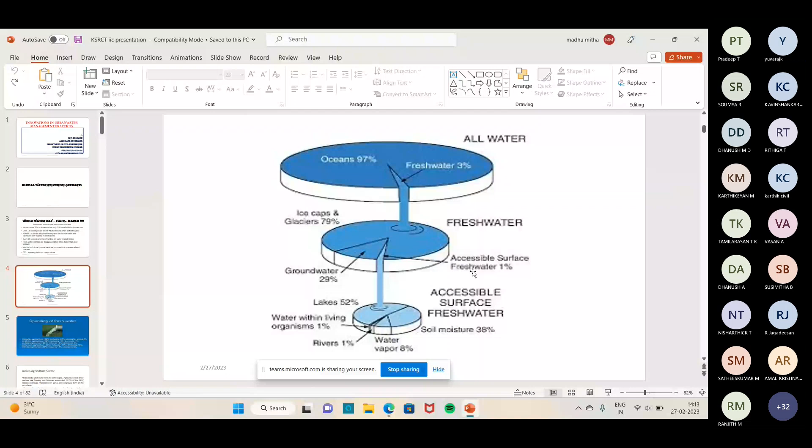This is what I just mentioned. Ocean covers 97 percentage, and the remaining only 3 percentage is freshwater available. Within this freshwater, only 29 percentage is available as groundwater, and only 1 percentage is accessible surface freshwater. So you see here, at least only 1 percentage of water is available.

Among this 1 percentage of available surface water throughout the globe, within this 1 percentage, lakes cover 52 percentage, water within living organisms covers 1 percentage, and the remaining soil water covers 38 percentage.

So almost 1 percentage of water only covers the river streams. So imagine the availability of water. Though there are plenty of water available in this world, only 0.03 percentage of water is available as river, or stream waters.

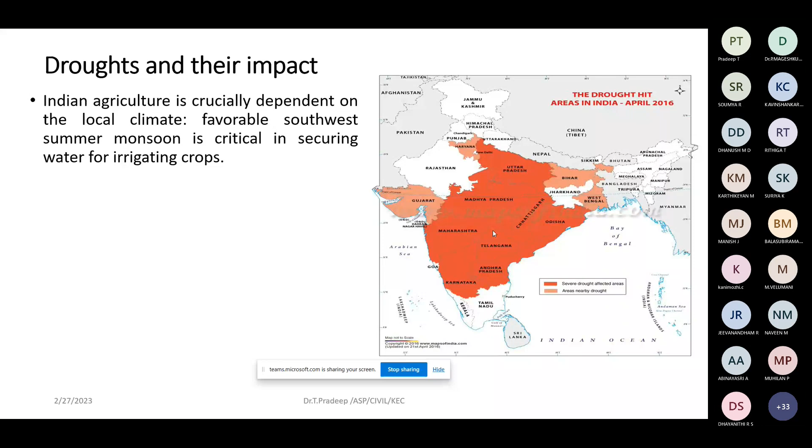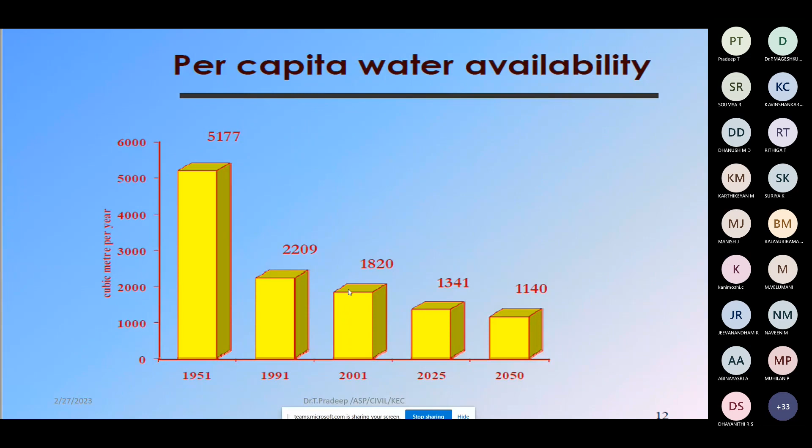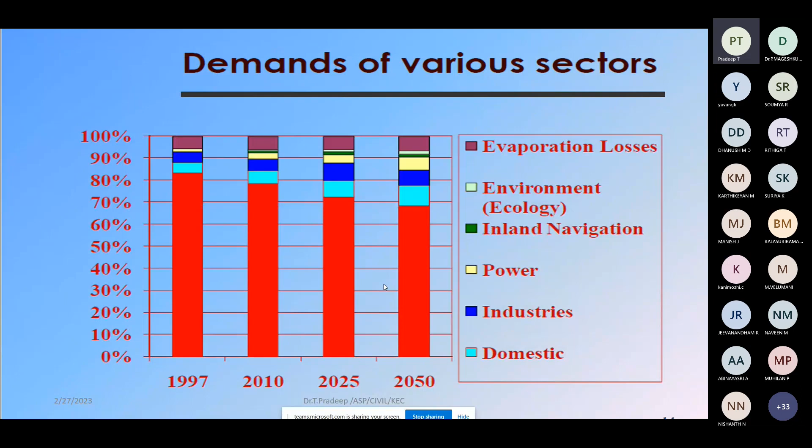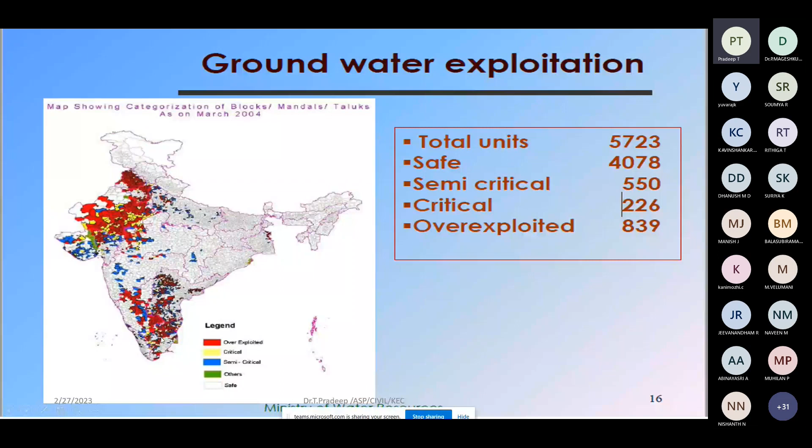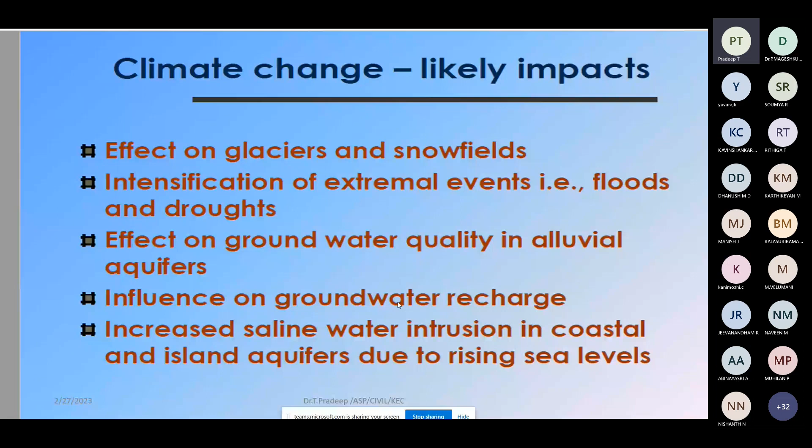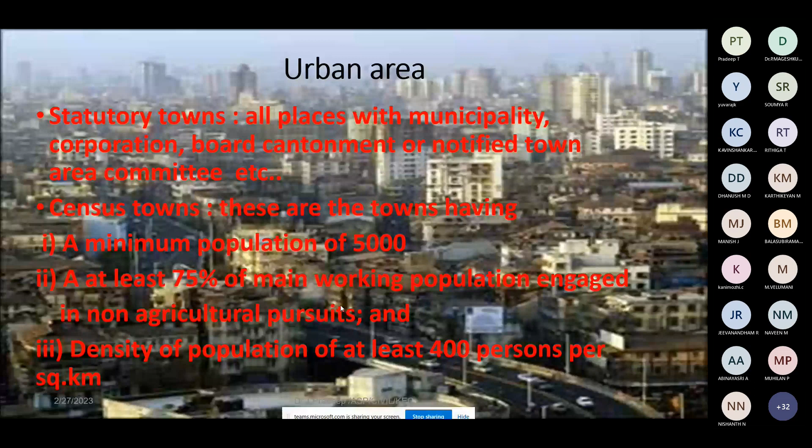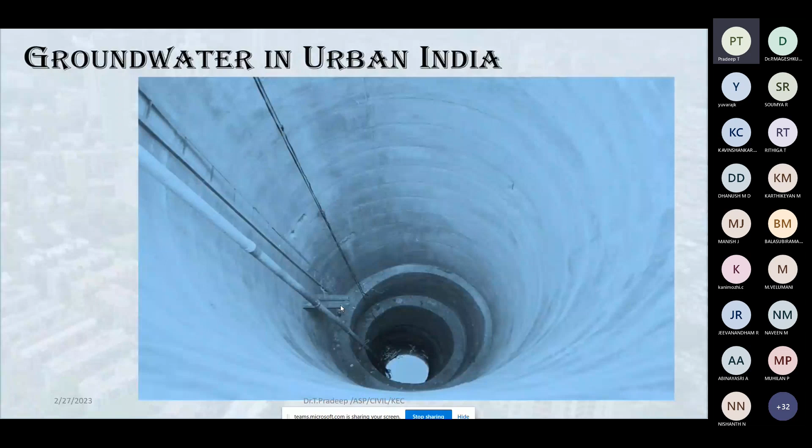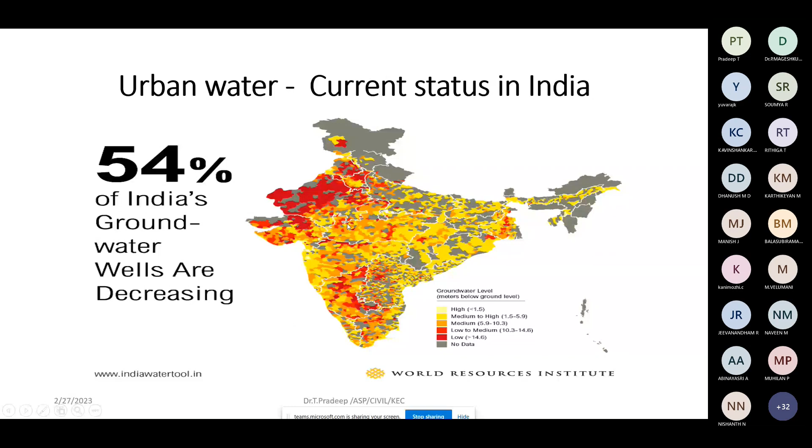Yes, this is also another category, in the form of the simplest explanation. We are getting 4,500 kilometer cube of water from rain per year. So you can imagine what is a kilometer cube and what area it consists of.

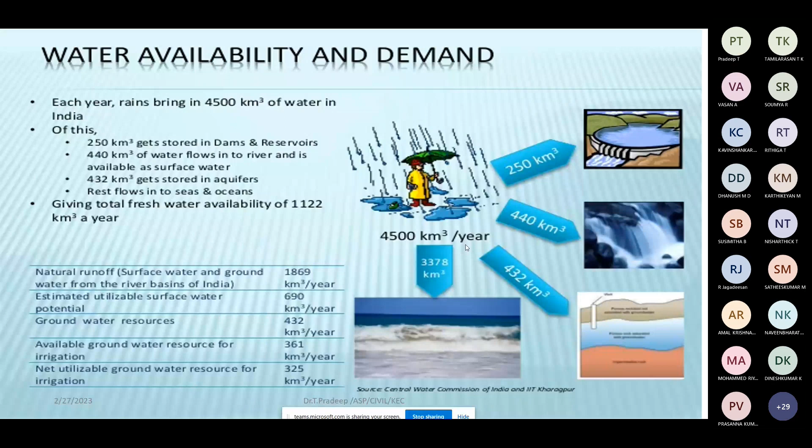Now, urban water management in India. About 30% of people in India live in cities, and this is expected to double by the year 2050. So imagine the amount of water required during 2050 if that 30% doubles. For example, if 50% of people live in cities and 50% live in rural areas, you can imagine the exact amount of water required for rural areas is directly equal to the amount required by urban people also. So with the growing economy and changing lifestyles, the pressure on already strained water resources is increasing.

That is why the government has taken an initiative and established Integrated Urban Water Management, IUWM, as a new framework and approach for the nation. They are planning so many activities like the Urban Clean Ganga projects and many other projects, even for small categories of projects. They are establishing and taking charge of these kinds of initiatives under Integrated Urban Water Management.

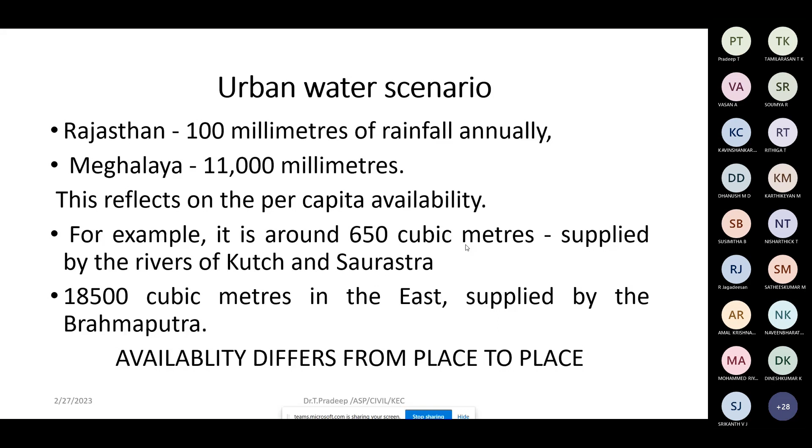So that is the challenge behind urban water management. For example, I can quote an example: in Bangalore, which is an urban city, Bangalore draws water from river Cauvery, which is around 100 kilometers far away from the city.

What is the reason behind this? Even though river Cauvery is 100 kilometers far away from the city, they draw water for day-to-day life from this river, even though it's far away. The reason is, most of the roads in Bangalore, as you may be aware of this city, most of the roads and pavements are made up of concrete.

This concrete won't allow water to filter into the ground. It will directly allow the water to run through wherever slopes are available, and the water easily runs through it but is not percolated into the ground. That is why the groundwater recharge level in the nearby area is very low. It is not possible to get enough water from wells located in and around Bangalore city. Even if you go for a borewell located inside Bangalore city, it is not possible to get water even after 100 feet, 100 meters of borehole. So this is improper planning, and this is what we have to concentrate on as civil engineers. We should also take a view on this.

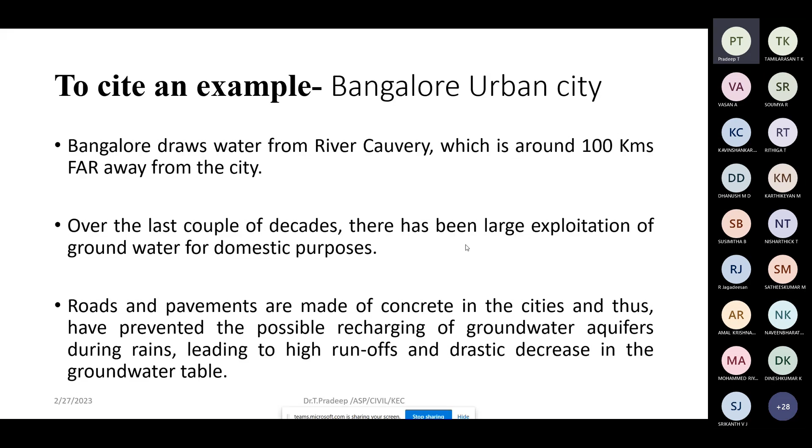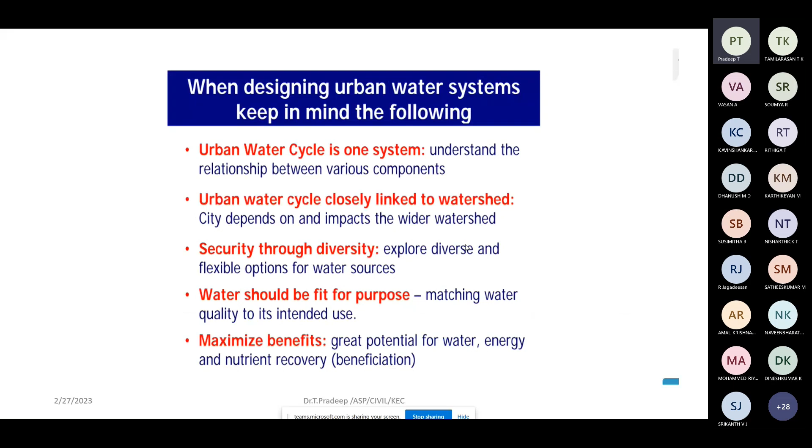This is another example of why water management, if not proper, causes us to suffer. While designing urban water systems, we should know the actual urban water cycle and how it is closely linked to watershed, security through diversity, with water fit for purpose for maximum benefits. Doing more with less integration is the key.

So what is the problem? A holistic systems approach to the urban watershed is needed. What is meant by watershed? It consists of water reachable areas. If you connect almost all the watersheds, you will get a very large amount of water moved from one place to another.

So we can carry out some integration activities. For example, a tailored IUWM, or integrated urban water management framework, is required for developing countries. Take a country as an example: there is water scarcity due to highly polluted water bodies, intermittent and irregular energy supply, fast growing cities, low pressure, lack of wastewater collection, high level leakage, and poor solid waste management. These are all standard problems identified in any city.

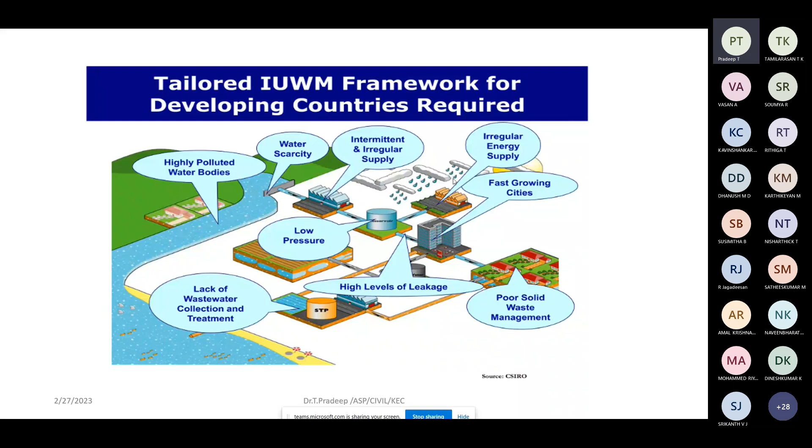In order to overcome these problems, an integrated approach is required. For example, stormwater, leakage, and demand management: there is groundwater and surface water supplying the water supply system, and water is sent for various purposes such as toilet and kitchen waste into septic tanks. From the septic tank, water goes for wastewater treatment, and it recharges and goes back into the water supply system.

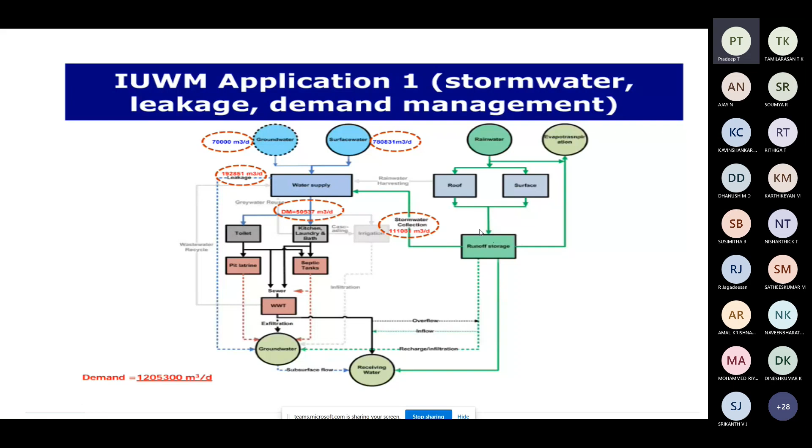So where is the source? Groundwater, surface water, rainwater, and evapotranspiration, with rainwater converted into roof water, surface water, and runoff storage. It should be somewhat cyclic in manner, so that it is possible to store at least some amount of water. This is also one of the places facing these kinds of issues in urban water management.

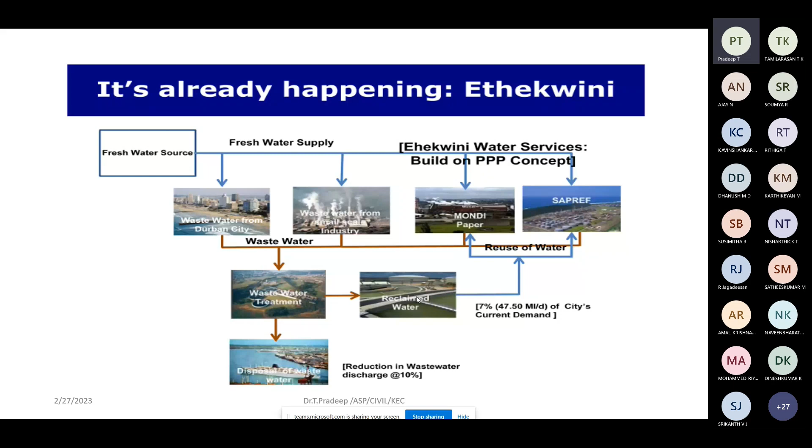They are getting fresh water supply built on a PPP concept to the Durban city, along with wastewater from small scale industry. This wastewater is sent to the wastewater treatment plant, and the remaining water is disposed or reclaimed for reuse. In small cities, they follow this approach with wastewater treatment plants, reclaimed water, and disposed water as integrated approaches to store water effectively.

This is what I already mentioned about water security threats. Taking three important threats: water security, enhancing irrigation potential, flood management, drought, climate change, and recycling and reuse of water are the major challenges in India for making any kind of attempt. Before attempting urban water management practices, these are some of the threats - water security is very essential, and drought and climate change must be managed. So there are hurdles or challenges available, and you have to overcome these to reach that particular level.

This is again the same point - challenges in water supply include rapid urban growth. Some additional challenges are urban growth, slums and poverty, climate change impacts, leaks and unaccounted water problems, weak political leadership, weak regulation, and institutional complexity. There are numerous factors available that have to be considered before getting into project management.

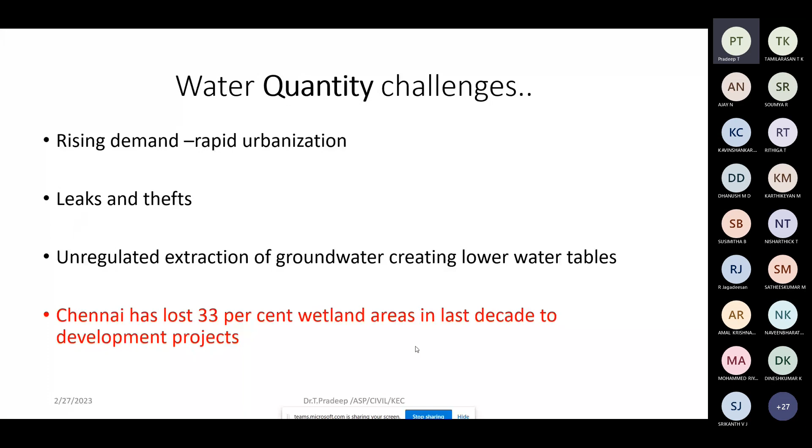One example I have quoted - how did Chennai lose its water? Three rivers, the Cooum, Adayar, and Kosasthalaiyar, are the main rivers in Chennai. They flow through Chennai into the Bay of Bengal. The Buckingham Canal connects all these three rivers.

Chennai used to be a water surplus metropolitan city till a couple of decades ago. Following the age-old conservation traditions in Tamil Nadu, they had an abundant amount of water two decades before. But what is the state now? What is the status in Chennai city? I don't want to explain because you yourselves know well the water scarcity that has taken place in Chennai.

We have also come across some floods - in recent days, two floods we have faced in Chennai. Even though there is an amount of water, it is due to poor management. Due to poor management, Chennai is facing a lot of floods.

Chennai had nearly 2 dozen water bodies, including 3 rivers and the British period Buckingham Canal. Today it is reduced to half a dozen. So 2 dozen means 24 water bodies were there; now they have only 6 water bodies. Where are the water bodies now? Because we have constructed so many buildings over the water bodies.

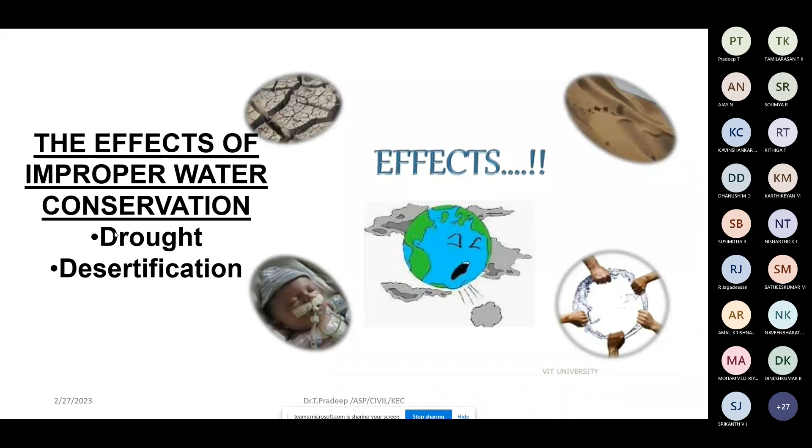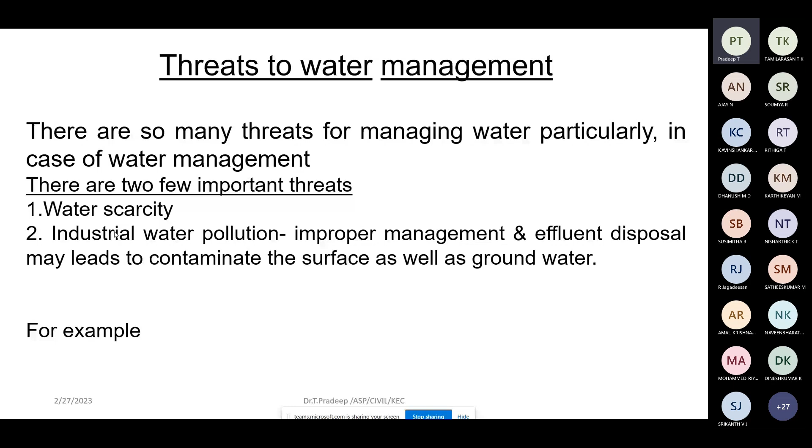There are some major threats: drought and desertification due to improper water conservation, water scarcity, and industrial water pollution. This is also another scarcity issue. There are some industrial heavy metal effluents - heavy metal, dangerous metals are there.

For example, if you take nickel, a heavy metal industry - there are categories like engineering industries, paper mill, fine chemical, and dyes. There are 4 kinds of industries, and each industry used to discharge their water into the river. Suppose the water is not properly treated, and without treating it, the water is directly sent into the river - then what will happen? It will directly affect the quality of the river water.

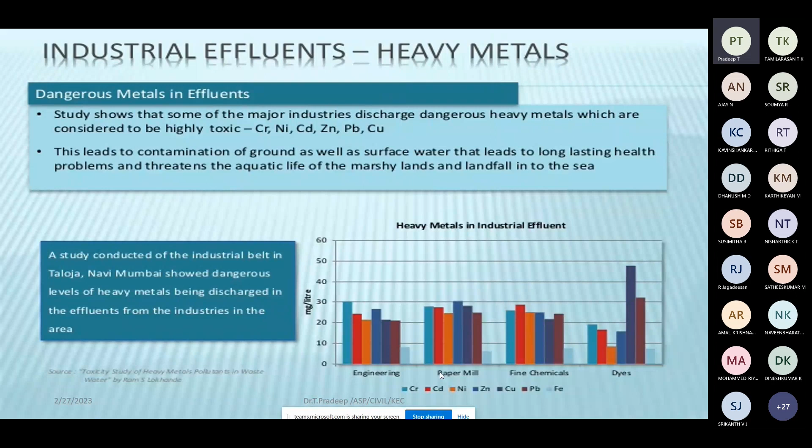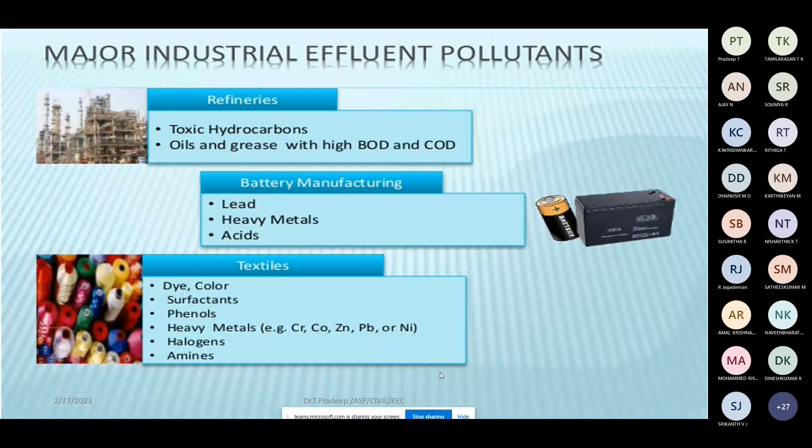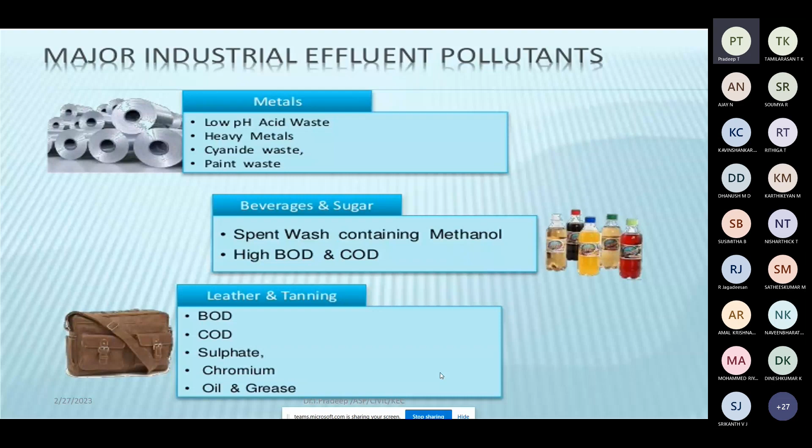So there are major industries - for example, battery manufacturing, refineries, textile industries. Though there are a number of industries, I have quoted a few important ones which have more toxic water processing: chemical industry, ink industry, pulp, paper, metal, beverages, and leather tanning industry are the important factors. These are industries that we have to give much more concentration to than others.

So what is the treatment process? What is the solution against pollution? It is water source management, water storage, treatment, and we have to recycle the water as much as possible.

There is a process called ZLD, zero liquid discharge process. It is the one we are following for most industries located in Tamil Nadu. Zero liquid discharge means that if you supply 100 liters of water for an industry, it should be properly treated after processing. For example, if you supply 100 liters of water, 80 to 85 percentage of it is converted and used for that particular process it was meant for. The remaining 20 percentage of water, along with the sludge, is converted as waste.

So what we have to do is send the water into the wastewater treatment plant. Among the remaining 20 percentage of water, they segregate and extract water as much as they can. So of that remaining 20 percentage, at least 15 percentage is recycled. This is called a zero liquid discharge process, so there will be no waste.

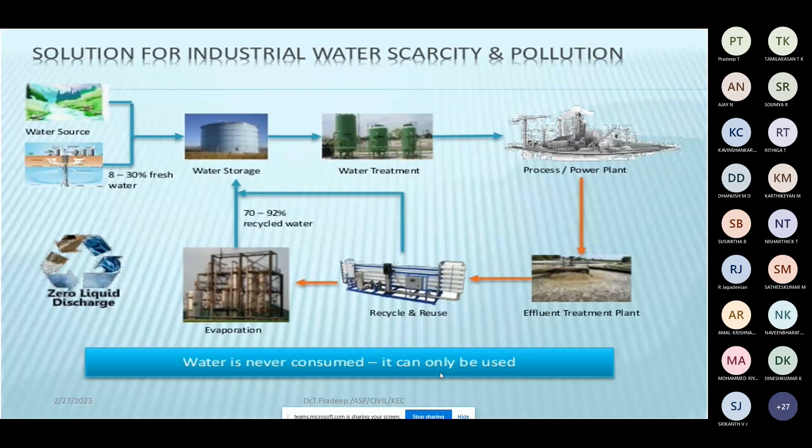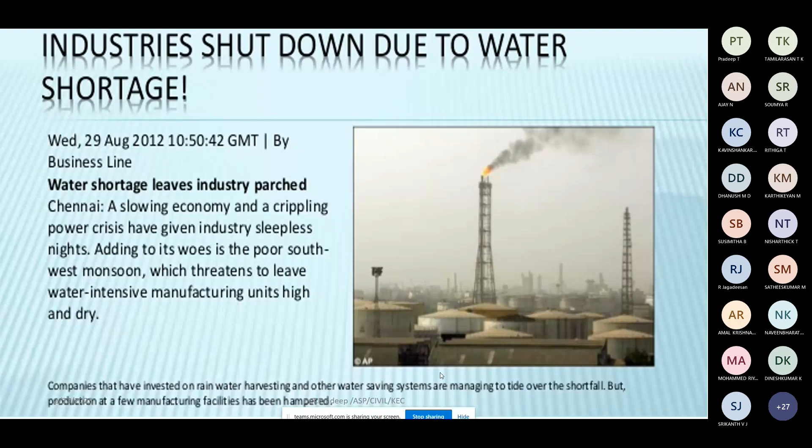One power plant also got shut down due to poor water shortage. The Vizag steel plant was also recently affected by this kind of water crisis. Vizag steel plant is one of the important and heaviest plants when compared to other Indian companies - one of the biggest plants, with n-number of products. They deal with crores and crores of liters of water for their industrial purposes.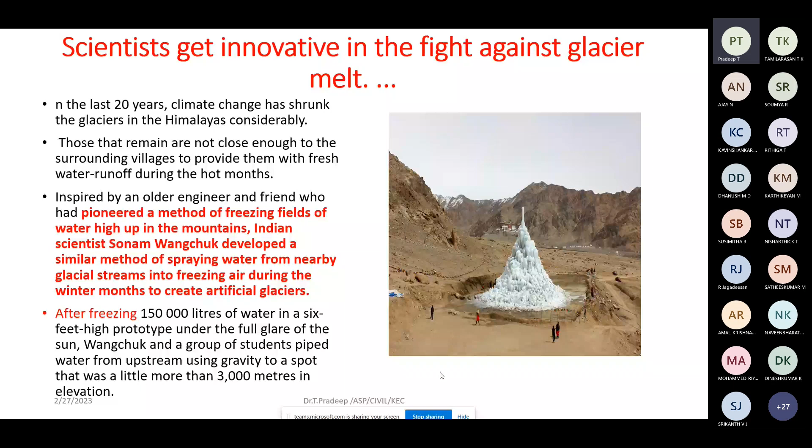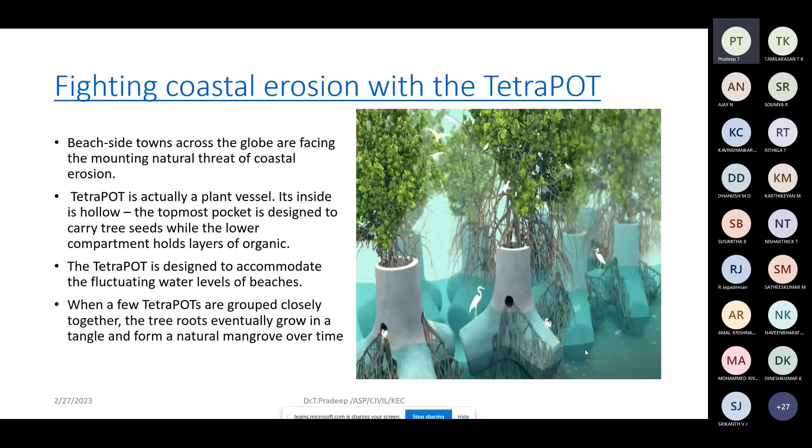Fighting coastal erosion with TetraPOTs - you might have come across these in coastal areas, used to avoid coastal erosion. Digitizing water supply lets you use water in a proper way. WaterSeer technology turns air into drinkable water, meaning the moisture content in air contains water, and this technique converts that moisture into actual water.

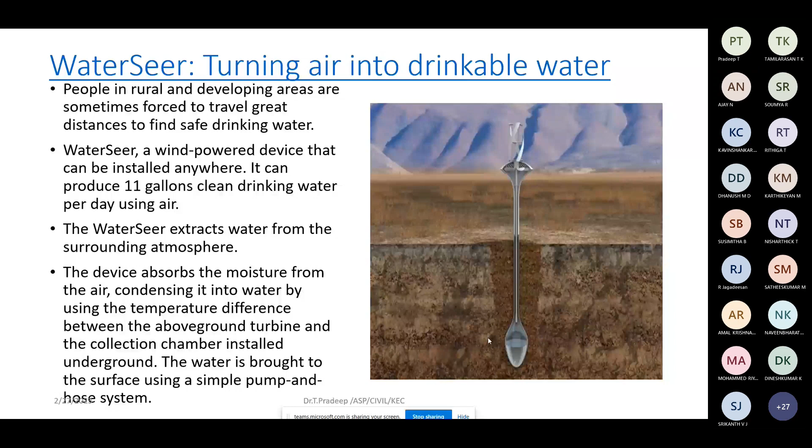Affordable filters are an innovative solution to water shortage, helping get water from one place to another. Fontus self-filling water bottles use humidity and moisture content so these bottles fill themselves - this trial and error method was developed by Austrian designer Kristof.

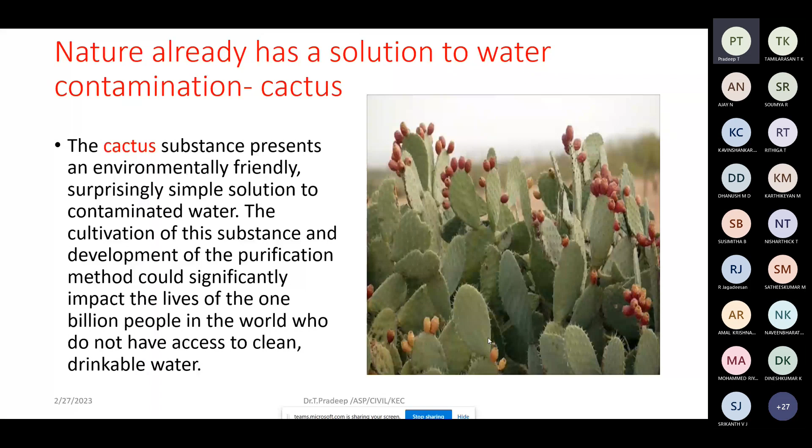Nature already has a solution to water contamination - that is the cactus, which is one of the water purification agents. Portable water purification for developing nations includes the LifeStraw mission, another important initiative to protect water.

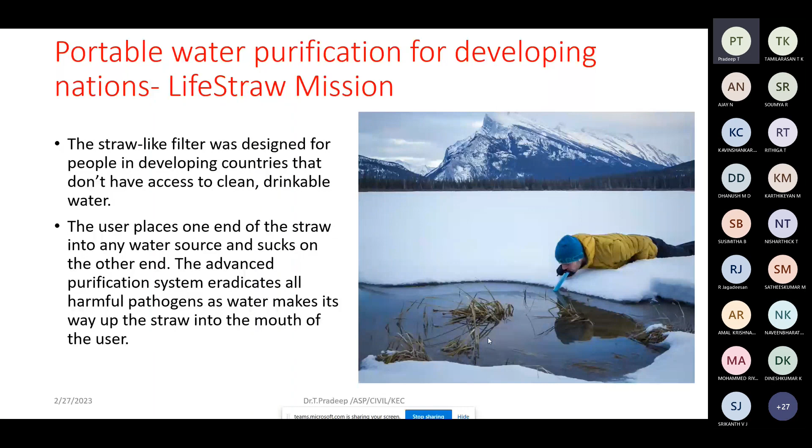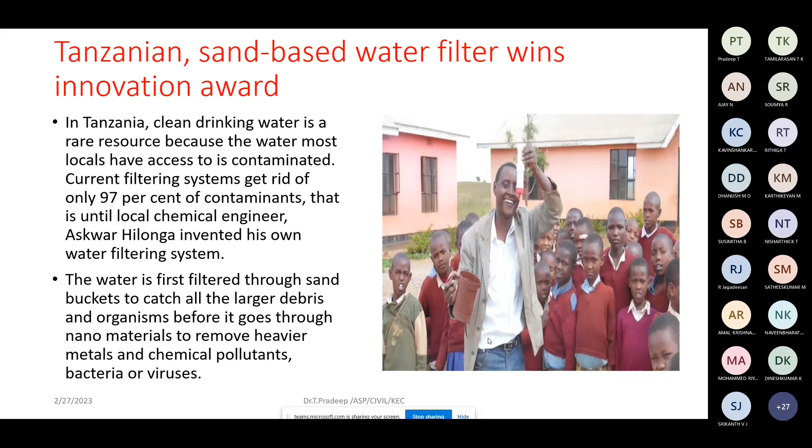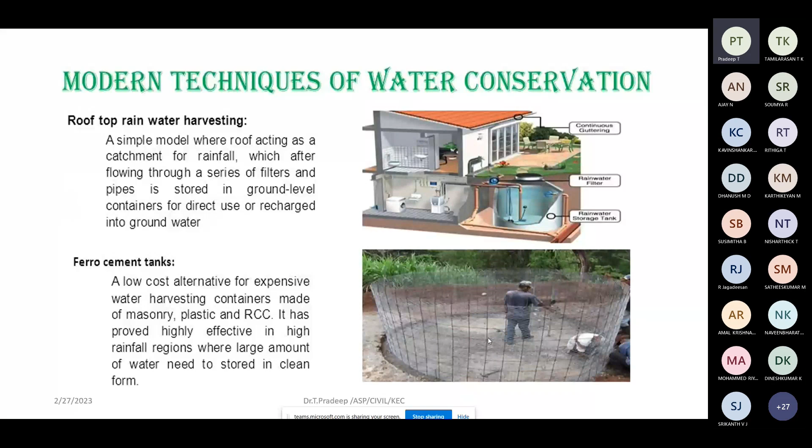Warka Water creates water from air, similar to the WaterSeer technology. Some other modern techniques to conserve water include rooftop conservation - that is the rainwater harvesting system I told you about - and ferrocement techniques to conserve water.

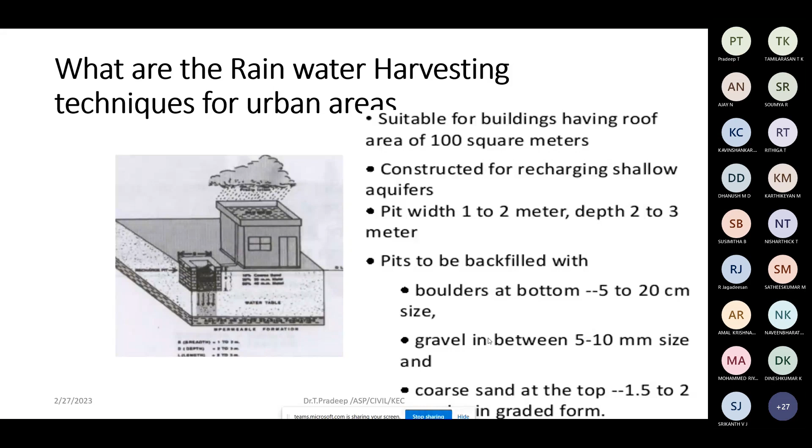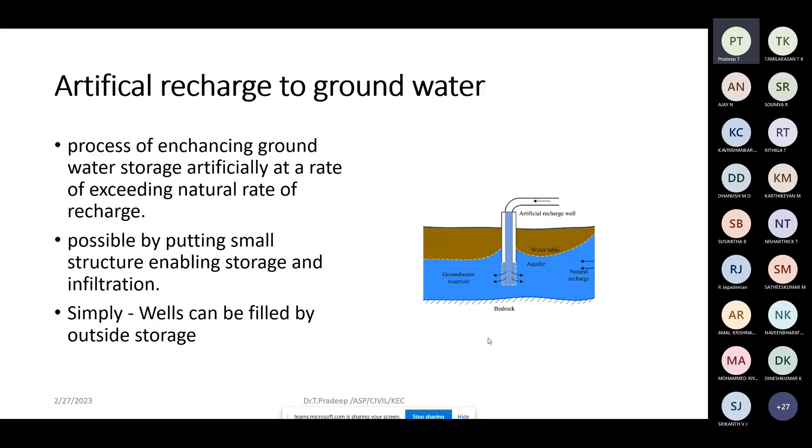There's no need to explain rainwater harvesting, since it's practiced in almost all places in Tamil Nadu. Artificial recharge to groundwater is another important technique to recharge groundwater artificially - this is again important in Bangalore, as I told you, which already had a water scarcity.

In order to avoid and overcome water scarcity, they have attempted many practices. One of the places, Hubli in Bangalore area, has a smart water metering system. Whenever you are not available at home, it will immediately send a message that water is coming, so you can reach home and utilize the available water properly. The message will blink on your mobile phone. Organizations like Sirutuli or Next Drop, some private organizations and NGOs, have come up with beautiful solutions to overcome water supply issues.

Smart water leak sensors, smart water meterings - all these are small techniques to conserve water. They may seem smaller in manner, but they conserve water to a bigger extent. The reason for smart water metering is that it provides us how much water we are getting daily, monthly or weekly, whatever it may be, and it helps us avoid unnecessary water usage.

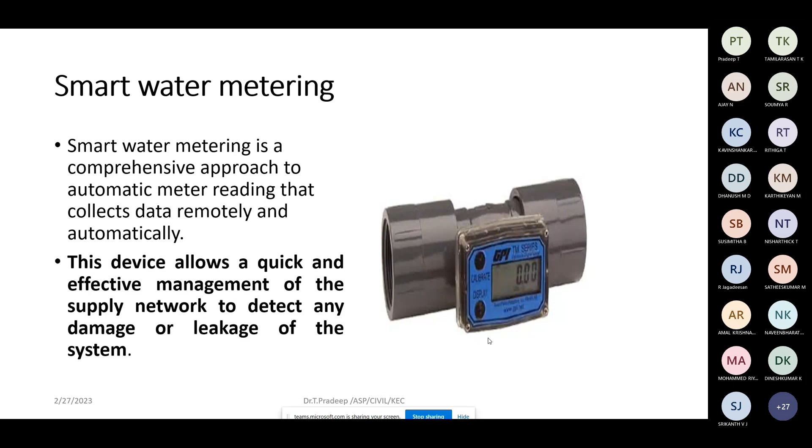Some of the historical water conservation practices in India, a glimpse: Jahalra, Paar system, Talab, Bavari, Taanka, Panamkeni are some of the oldest water conservation techniques. Still, some places in India follow these historical water conservation practices, which help conserve water to a bigger extent. Let us go through them one by one quickly.

Jahalra is located in the Jodhpur area. It was constructed in the year 1660 AD. These step wells collect the subterranean seepage of an upstream reservoir or lake. It is called Jahalra, located in Jodhpur areas.

Paar system, Rajasthan - a common water harvesting practice in western Rajasthan. Rainwater flows from the catchment area to percolate into the sandy soil, allowing access to percolated water through ponds. These are like small wells, not deep wells, short wells in the area, similar to the Paar system.

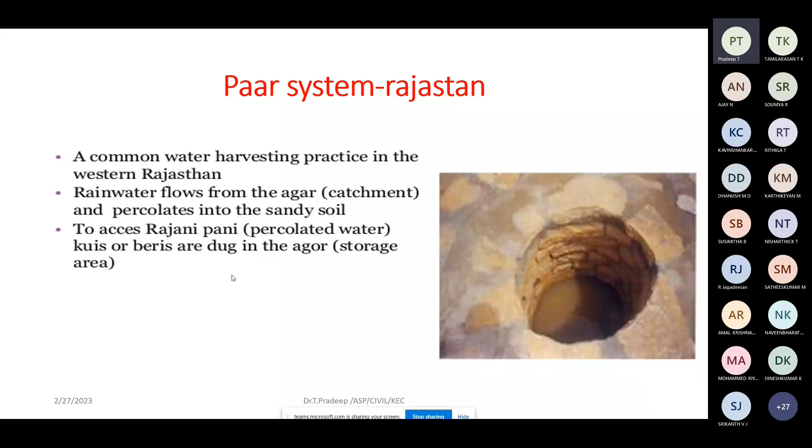Talab or Bhandhi is located in the Udaipur area. These kinds of waters are used for drinking purposes. In the seasonal monsoon periods, it is also used for agricultural purposes, to cultivate some of the rice crops.

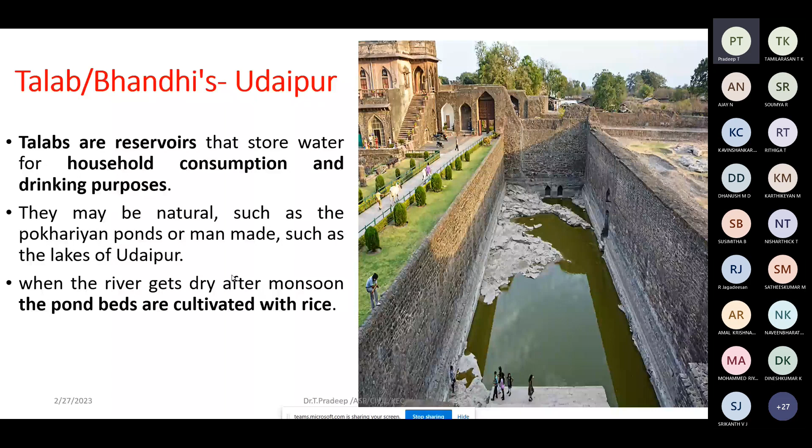Bavari is located in the Rajasthan area. Bawaris are unique step wells that were once part of the ancient network of water storage in the cities of Rajasthan. They help reduce water losses and evaporation. A series of layered steps were built around the reservoirs to narrow and deepen the wells.

Taanka, in the Thar desert region of Rajasthan, is like a surface well, similar to open wells. They also have this kind of taanka wells at the Thar desert, Rajasthan.

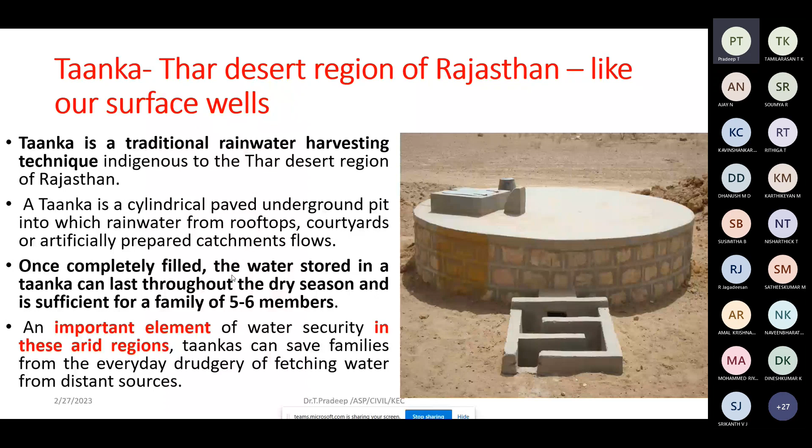Panamkeni is available in the Wayanad region, built with the help of stems of toddy palms. Toddy palms are located in Wayanad, Kerala area, which is rich in water. They have these small techniques to store water in small places. This is the secret behind how these wells have abundant water even in the hottest summer months.

Possible options for action include technologies and practices for conservation of agriculture on a large scale, water pricing, watershed development, and increasing awareness to improve water use efficiency in the agricultural sector. Other techniques include introducing clearer incentive structures, addressing declining water tables that increase pumping costs, sanitation, strengthening cross-sectoral water governance, and ensuring sustainable financing and subsidies to maintain existing public irrigation infrastructure.

So these are some glimpses of water management practices in India, how we are following water management categories and techniques. Unless we have proper awareness and proper technology, it is not possible to conserve our water systems, particularly in urban areas, because of day-to-day life and urbanization. It is not easy to look into this matter seriously, but we have to take it seriously so we can carry out activities to protect our water well.